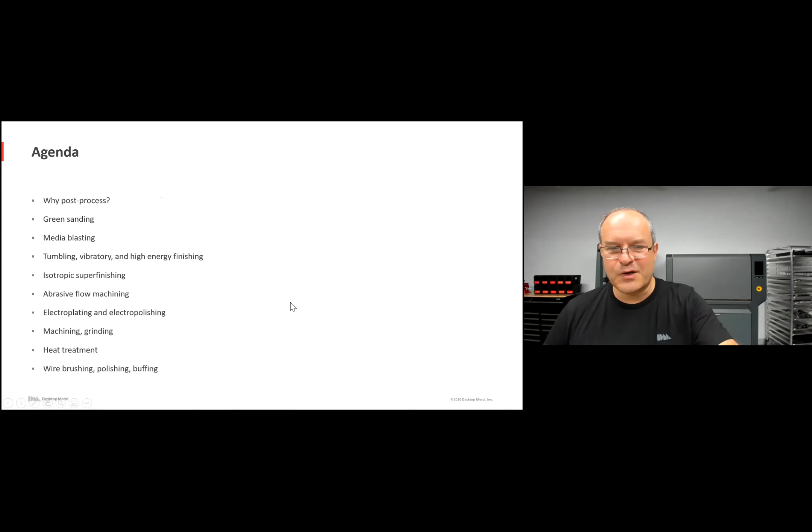First, a little context. Desktop Metal's mission is to make 3D printing accessible both for the early stage of the product development life cycle, so engineers, designers, but also for manufacturers, so you can manufacture actual end-use parts and produce parts, whether they're small parts, large parts, by the thousands or millions if you need.

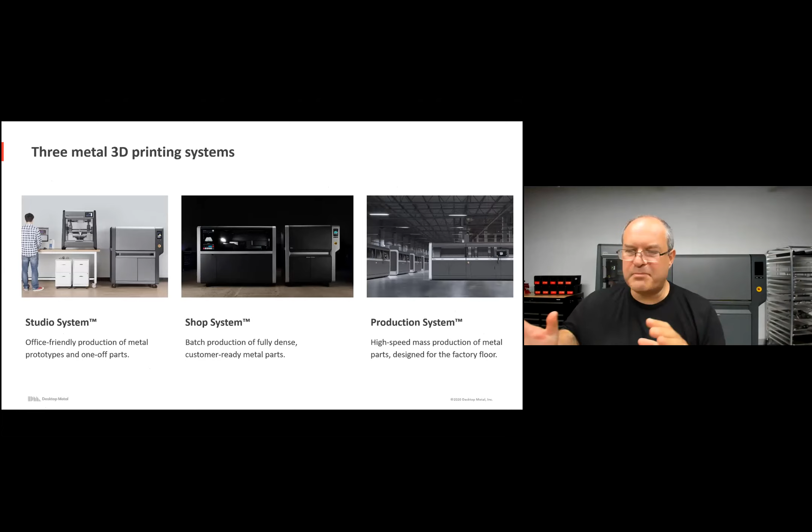And we've brought to market 3 different systems. The Studio system for office-friendly prototyping, that's the system right behind me - you wheel it through the door, plug it in, and start printing and sintering. And then for larger volumes, including batch production, mass production, there's the Shop system and Production system. We'll see parts from all of those systems and how the different finishing methods work for them.

So first, the need for secondary operation. It's worth saying that really not everything requires post-processing. There's plenty of parts that come out of the furnace, the part as printed and sintered, that work just fine. On the other hand, there might be applications where, for one reason or another, you might need to do some post-processing. So we'll talk about that, but it could be, depending again on the application, the dimensions, the design characteristics, that the part works just fine.

Now, what are the characteristics of metal 3D printed parts? Because they are somewhat different than, let's say, parts that are machined or parts that are cast. First of all, what do you get? You get a part that is near net shape, so it's close to what you need, maybe even works just fine.

So here's an impeller printed right on the Studio system. And you know what? This impeller will work just fine if you plug it into the machine that it goes in. And so with 1% or better tolerances, for many applications that's fine. But if they're not, then you may need to do some post-processing.

And so 3D printed parts do show some visible build lines. So here's a sintered part, and you'll kind of see the layers. This is the printing orientation, prints layer by layer, and so you can see visible layer lines. If you need to get rid of them, there are a few different options.

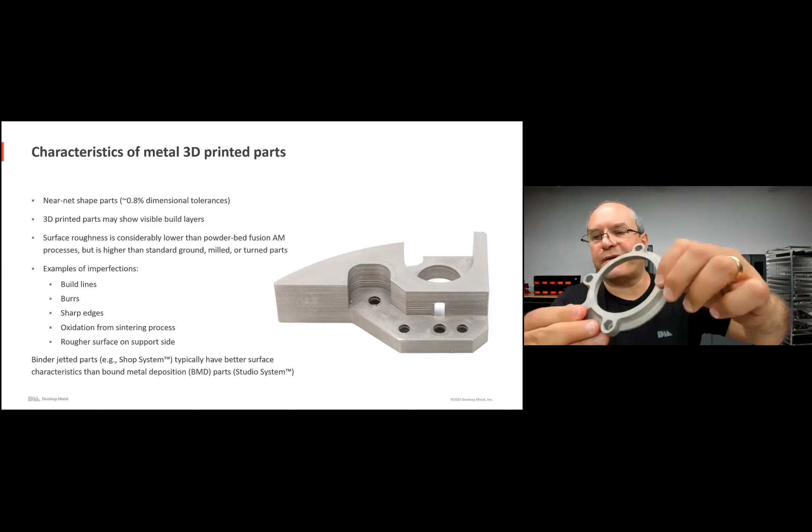Surface roughness is considerably lower than powder bed fusion, another common way to produce metal parts, but it is rougher surface than standard ground, milled, or turned parts. So for example, the surface roughness of this part, it's quite smooth, definitely smooth to the touch, but it'll be probably 3 or 5 micron average roughness, whereas machined parts are going to be smoother, maybe by a factor of 5 or even 10. And there will be, depending on the printing technology, some imperfections.

You might see build lines. There might even be, depending on the geometry, some burrs that you may want to get rid of. There also may be some oxidation just at the very surface, literally a couple microns worth - even though you might print it as stainless steel, in the furnace some of the chromium might have evaporated from the surface. So there might be just less than a micron kind of oxidation, but that's easy to get rid of with, say, media blasting. We'll talk about that as well.

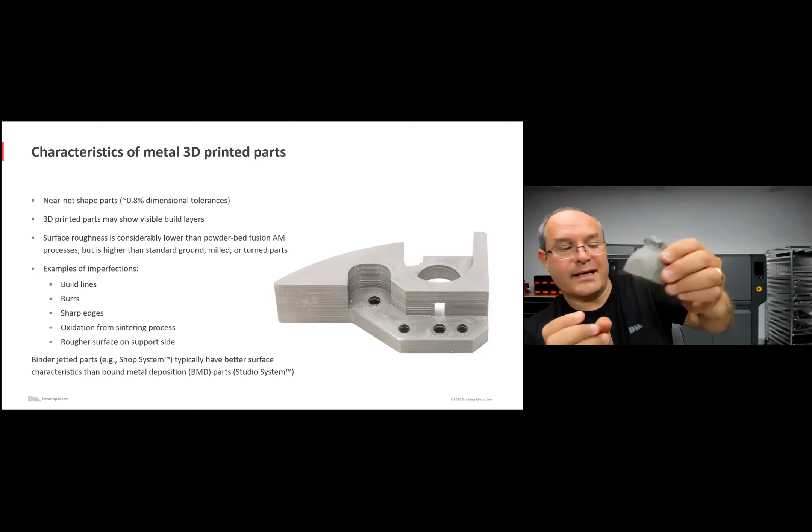Of the two different approaches, the studio system and the binder jetting solutions from the shop production system, the binder jetted parts have even better surface characteristics than the studio system parts. For example, this is a part printed on the shop system. You'd be hard pressed to see the layer lines, and this is quite a smooth part. Contrast that with this part, still smooth, but you can definitely see some build lines, toolpath kind of lines, and some imperfections, especially on the support side. That's what you get with metal 3D printed parts.

It's worth showing this comparison. I mentioned surface roughness. It's not the only reason you may want to do some post-processing, but roughness could be one. As sintered, you might have a roughness of 5 microns, and depending on which finishing method, you can get 5 times, even 10 times, or 50 or 70 times smoother. For example, CNC machined parts might have half a micron roughness versus isotropic super finishing.

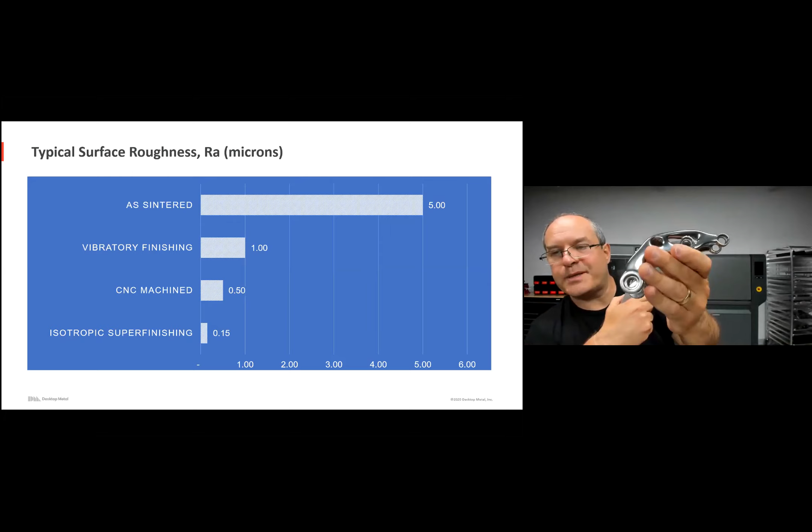So this is one example: a bracket for a motorcycle. Here it is resting on the support as it was printed on the studio system. But the part was also post-processed with isotropic super finishing - we'll spend a little time on that as well. And you see, you get remarkably, it's 150 nanometer kind of finish, which is insane. It's even smoother than machined parts.

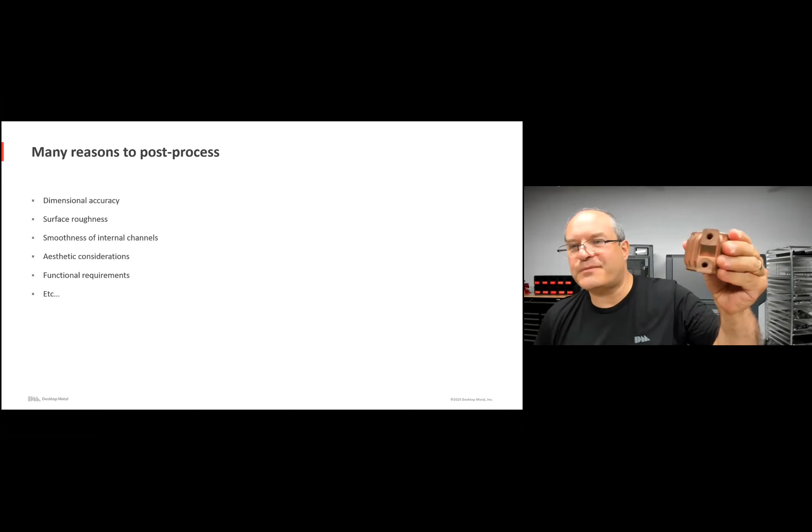So there's a bunch of reasons to post-process. Dimensional accuracy is one, surface roughness is another. You might have internal channels - for example, here's a copper heat exchanger that has internal cooling channels and some fins, as you can see. You may want to hone or smooth out the internal channels so that whatever fluid flows through there flows with less resistance.

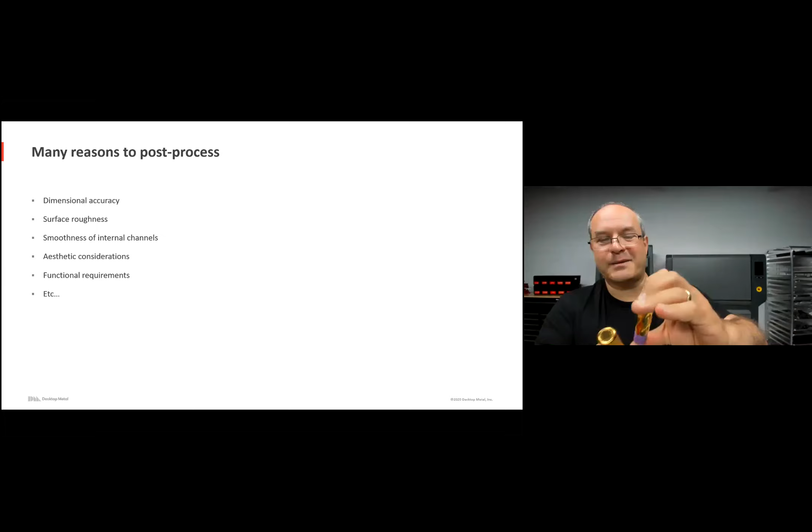And there could also be aesthetic considerations. Maybe you're printing prototypes of lipstick holders, lipstick cases, fully functional. Or you might have shift handles - see some of these examples finished in different ways. This is black nickel, this is gold plated, you do a nice chrome kind of finish. So there could be aesthetic considerations and other functional requirements, maybe you want to passivate a surface, for example.

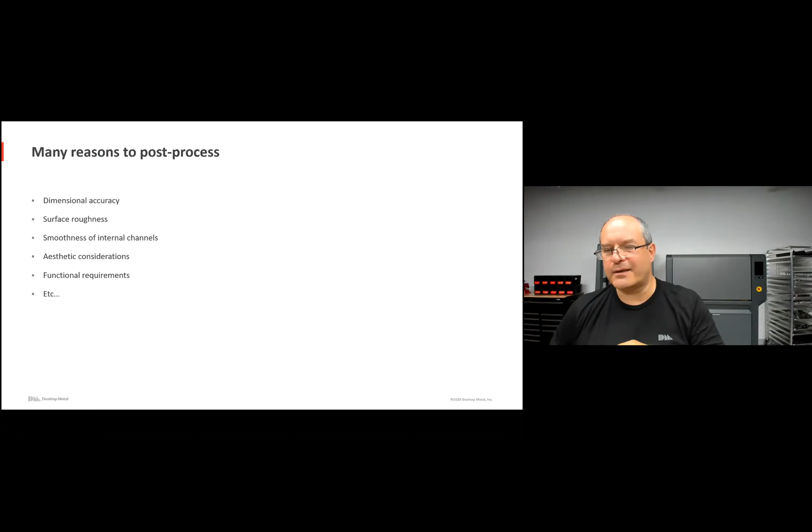So let's begin, let's look at a bunch of these different finishing methods. First is green sanding. What's green sanding? Well, the part when it comes off the printer - that's the printer right over there - when it comes out, there are minor imperfections in the printing process that you're going to see. And it turns out it's a lot easier to get rid of these imperfections while it's still in the green state, prior to sintering.

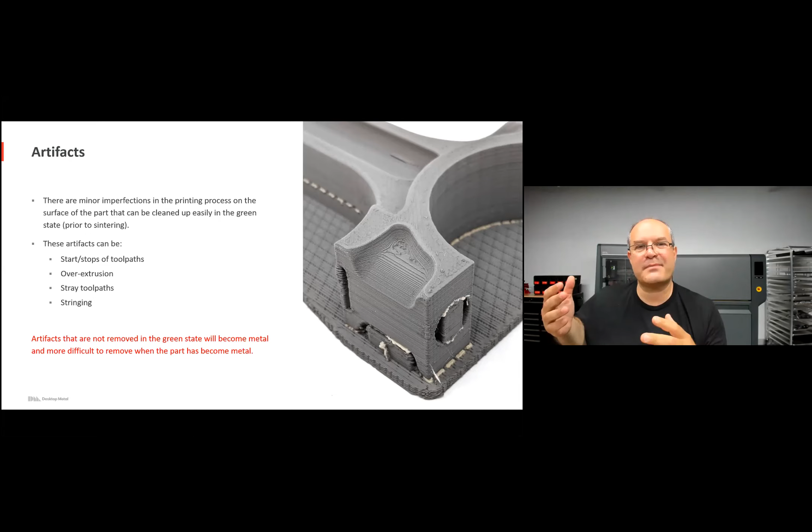In the green state, it's got the consistency of a crayon, and a crayon is much easier to cut away and smooth out. For all these artifacts, if you don't remove them at the green state, it'll be a lot harder, 10 times harder, 10 times longer to get rid of them once the parts are metal. So to the extent possible, if there's any obvious imperfections, green sanding is something that we recommend. This is a process that smooths out the build lines, the toolpath artifacts. It's performed after the printing process, and you can save a lot of time. You can almost eliminate the appearance of the layer lines, and get a surface finish that's much smoother.

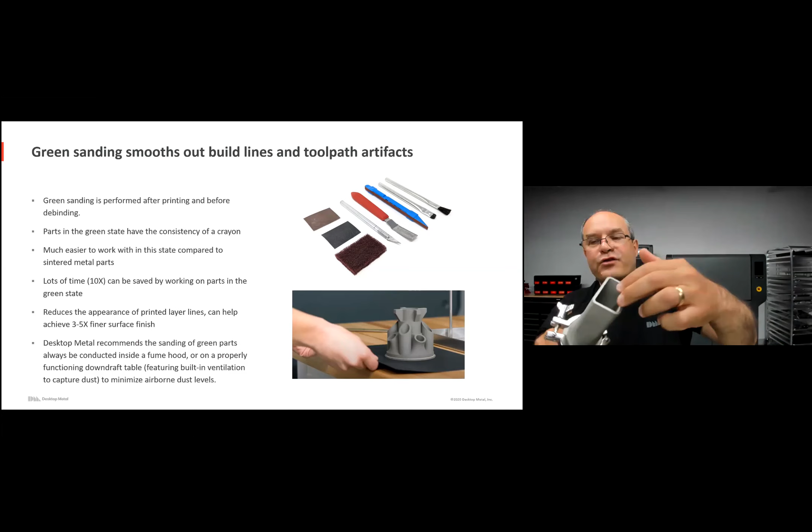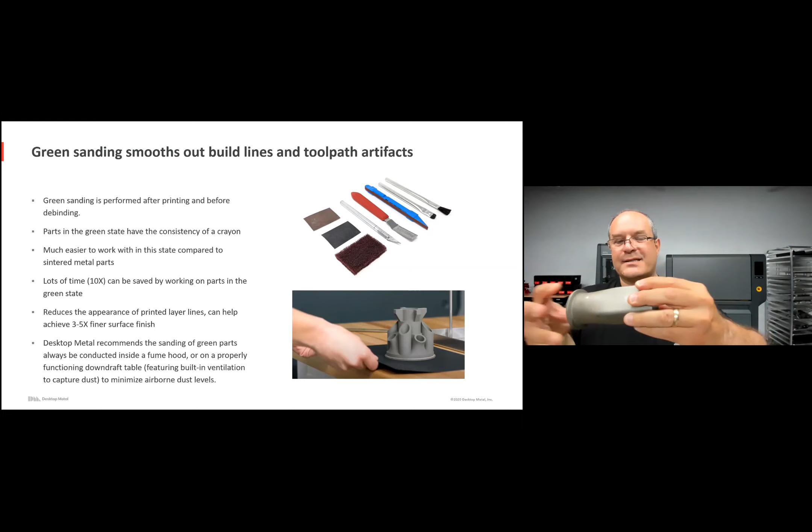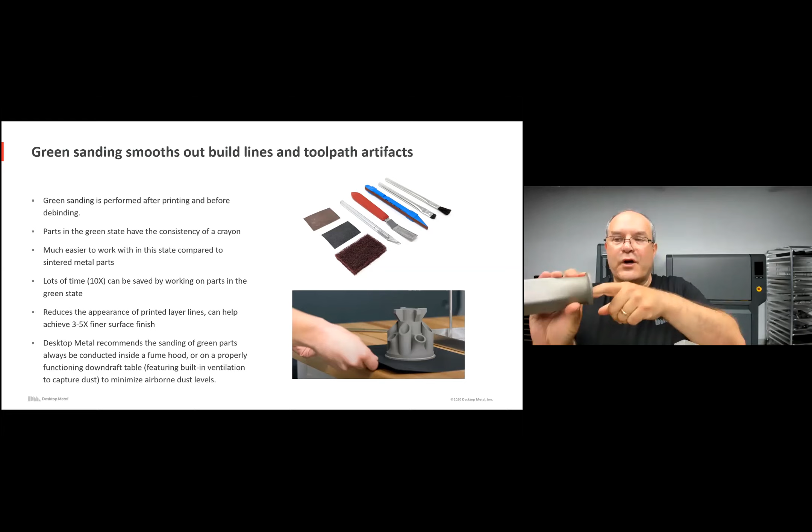I'll show you an example. So here's a nozzle, this is a standard part of machinery. This is the part that was printed. What's important for this nozzle, and I think we'll see this example in a few slides, is through this channel flows - I'll show it not connected - there's an interface. Through this channel flows a ceramic slurry that's thick and abrasive, and it flows better. This is an extruder, and out of this rectangular part is what the slurry is meant to be formed into. It's like a pasta maker, except you're creating a shape with thick ceramic mass. It flows easier if the inside is smoother.

Being able to polish or sand it in the green state, you can achieve a much smoother surface in here than with the standard part, where you can actually see the build lines.

So that's an example. We recommend sanding of these green parts to be inside a fume hood or a downdraft table that basically ventilates and captures the dust to minimize the airborne dust from the sanding process.

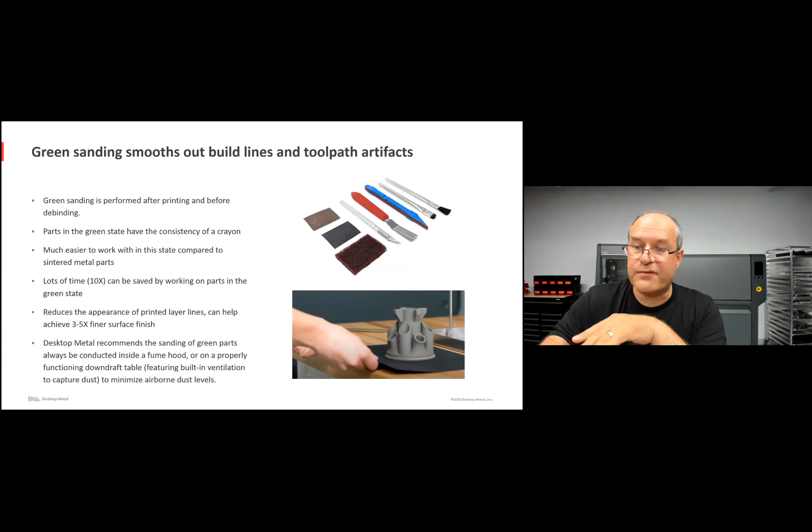What can you use? Well, Scotch-Brite, you know, you might use this on your barbecue grill, but you can also use it on the green printed parts. So the abrasive hand pads, for simple imperfections, you can just polish them.

And then you can use sandpaper in a variety of grits, progressively going initially with a medium grit, then fine, very fine, to really smooth out. It really depends on how much you want to get rid of. The trade-off here is sandpaper can get rid of material pretty aggressively, so you want to be kind of light with how much you use it.

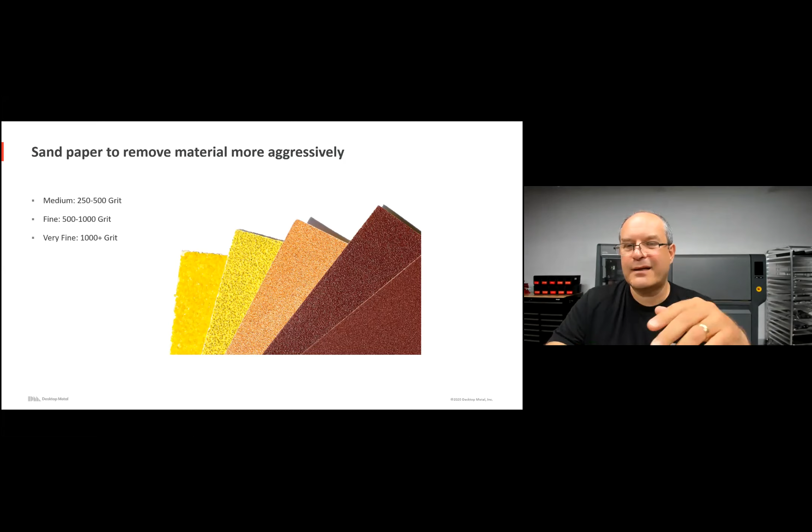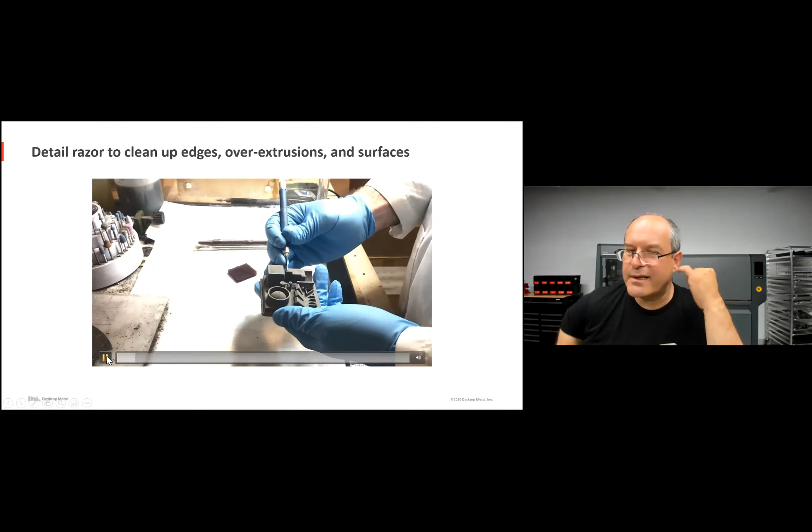So here's an example of a green part getting sanded. You can use a detail razor to clean up some of the edges. It really depends on what the imperfections are and what you need functionally from the part, but that does some amount of cleanup.

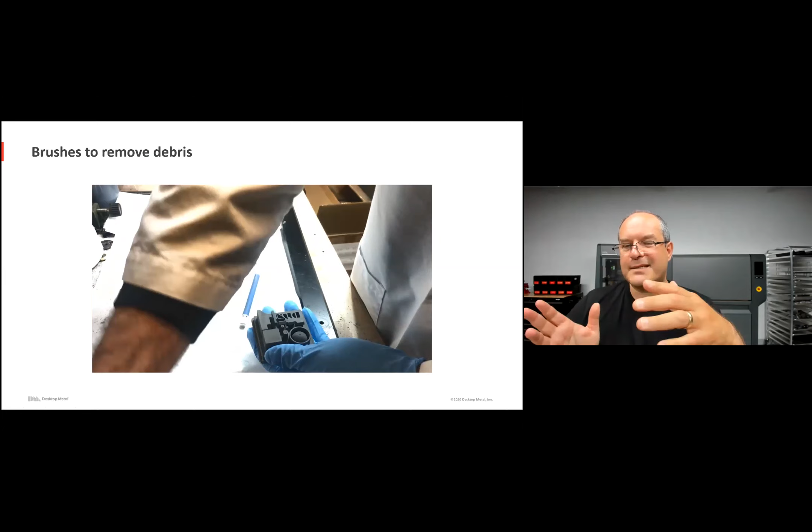You can even use a brush to get rid of debris, depending on how much debris there is. This is mostly necessary not for the mass production shop system, the production system. It's more for the studio system, a kind of extrusion-based shape creation, where this might be a useful technique.

So that's brushes. And here's the example, this is that very nozzle. Here's the interface.

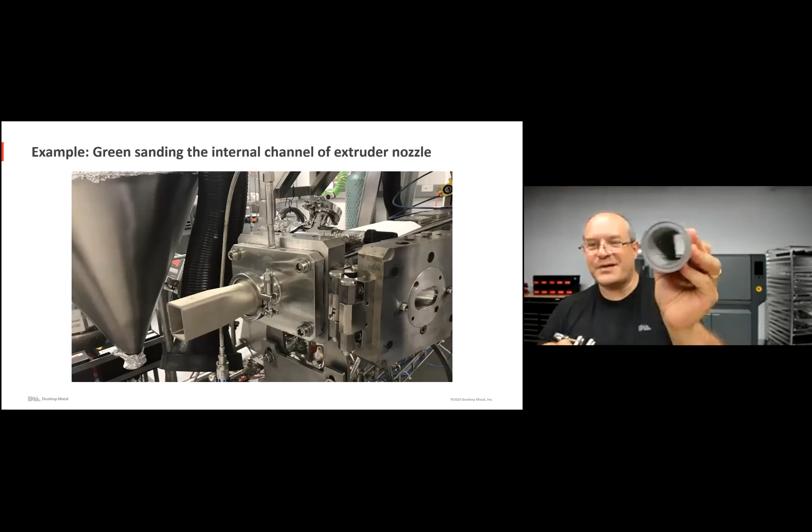So with a gasket, it comes on through here. The twin screw extruder pushes the ceramic slurry, and the less friction inside the channel, the better. So the green sanding was great as a way to get a remarkably smooth internal surface.

Okay, next is media blasting. This is a great way to remove surface imperfections. Your part is inside a cabinet, or you can put a bunch of parts inside the cabinet. Then, under pressure, you propel the blast media, which could be glass beads, loose ceramic alumina, or steel shot. They all have kind of different results.

For example, the spherical glass beads impinge on the surface and produce a very small dimple, and this dimple behaves like a concave mirror, so now you have a much more uniform, satin sheen to the parts.

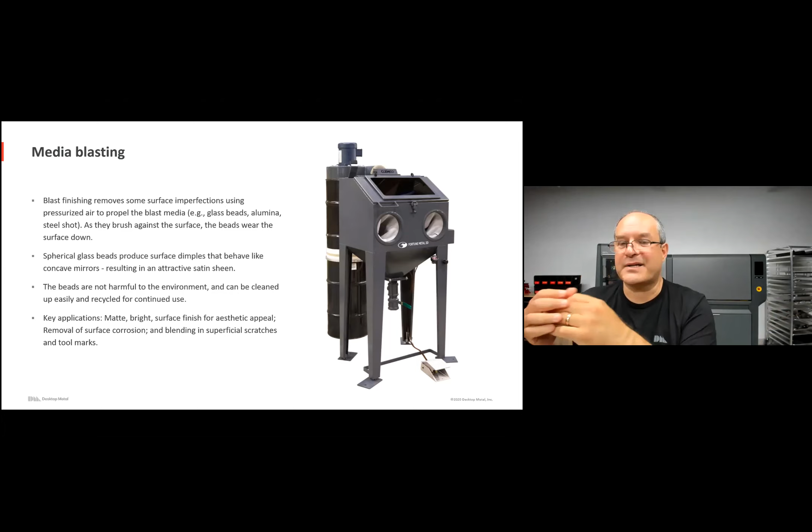Some examples, here's a part that was sandblasted. This is quick enough and easy enough that we recommend doing this with most metal parts. Now, if you're printing a part that's going to go into the bowels of some equipment, never seen again, and doesn't come in contact with people for the most part, no problem, but it could be useful to just do a quick media blast.

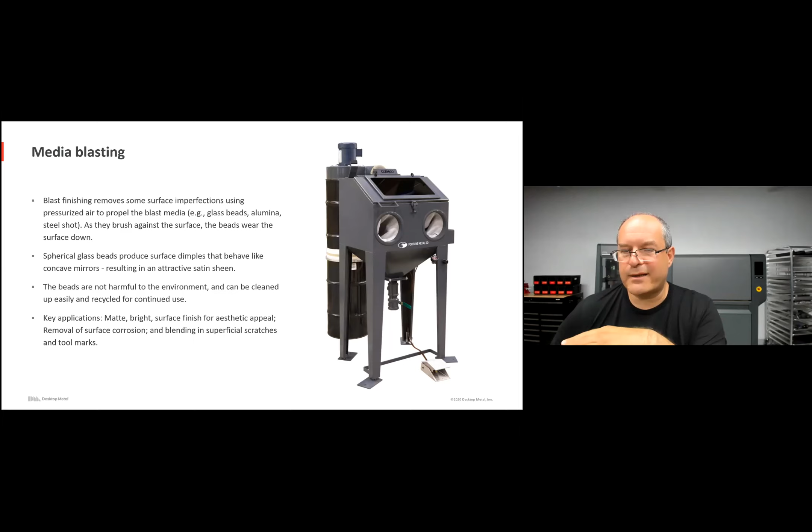The applications are to go from matte to bright on the surface finish for aesthetic appeal. You can remove corrosion - that's a great way. If there's a few hundred nanometers, or even tens of nanometers, of oxidation on the parts, sandblasting or using steel shot, for example, could be a great way to get rid of it and blend superficial scratches or tool marks.

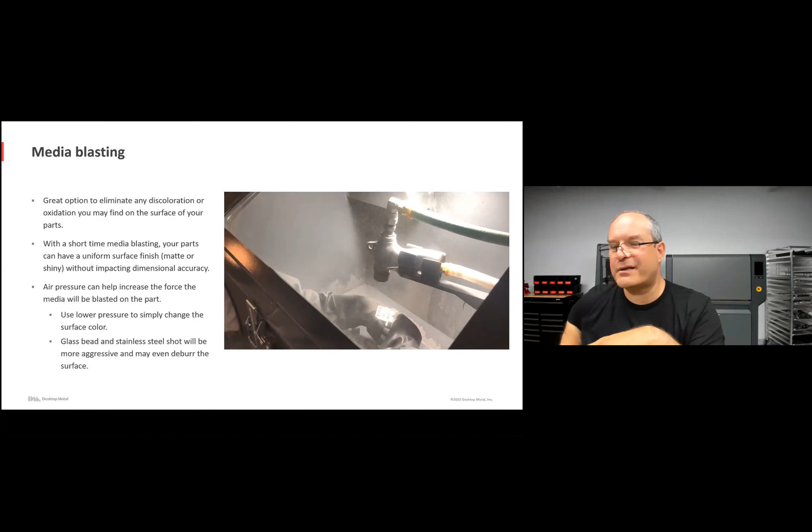You see this is a part, and the pressure is operated with a foot pedal, so you just put the part underneath, and under pressure inside this cabinet, direct the flow onto the part.

Even with a little media blasting, the parts will get a uniform finish, getting rid of any oxidation or surface imperfection, and it really doesn't impact dimensional accuracy on the part - you're not removing tens of microns of surface, for example.

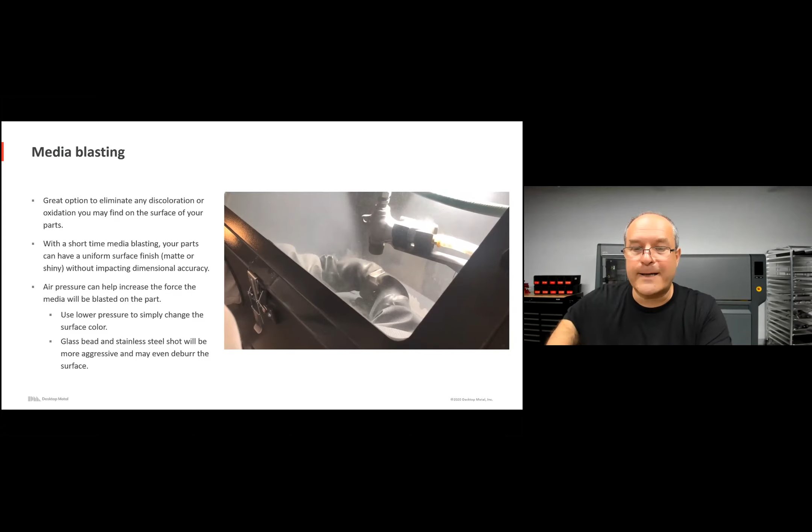And you can use lower pressure if you just want to change the surface appearance, and you can use glass beads or stainless steel shot if you want to remove more material.

Few examples, most parts leaving Desktop Metal get some sort of a blast, even if it's a crankshaft or a gear. This is going to be a sun gear inside a giant earth drilling equipment transmission gearbox, or this timing belt pulley, one of our customers printed for their manufacturing floor.

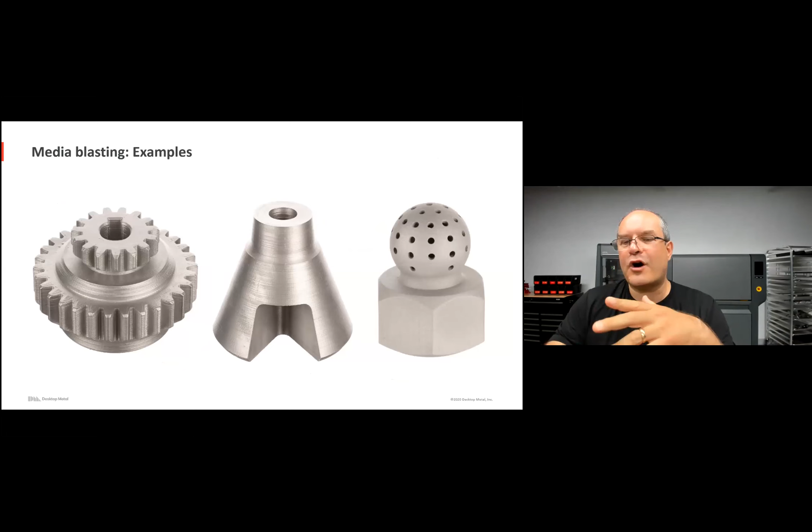So the parts, whatever the part is, spend a few seconds in media blast, you'll get a more uniform finish. I recommend the cabinets are low cost enough that it's kind of almost a no-brainer. If you're going to be doing a fair bit of metal 3D printing, that's a great thing to do. Put the parts through.

Fortune Metal Finishing has a great blast cabinet solution designed specifically for Desktop Metal. We work with that team a lot. It's a great cabinet, we have one here. At fortunemetal.com, you can see they have information on the blast cabinet itself, as well as an application note on what the benefits are of air blasting and trade-offs of different media finishes and what they get you.

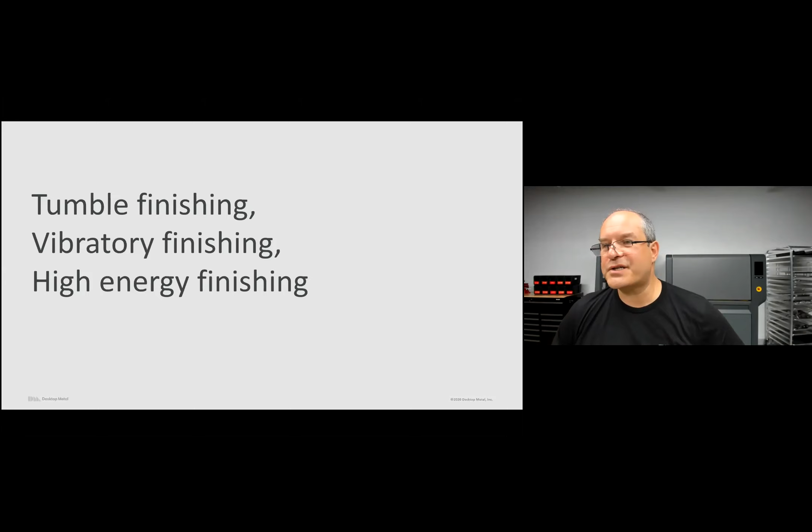Next, kind of a logical progression from media blasting is let's talk a little bit about tumble finishing, vibratory finishing, and high energy finishing. So what are these methods?

This is a group of processes where, with relatively low energy random motion, it could be spinning at moderate speeds, or in a container that's a vibratory bowl that's getting shaken. Basically put the parts in along with some abrasive media. It could be the abrasives, could be some fluid to make everything circulate evenly. And you agitate this container with some sort of mechanical method.

This is great for mass finishing. So you've got a whole lot of parts you want to finish, you throw them in for hours, or it could be a day or two even. And it works - by mechanically putting the abrasive media against the work pieces, they'll become smoothed out, you'll blend edges, blend away imperfections.

It's great for geometrically simple components. Why is that? Because if you have internal channels that might be harder to get into, you'll have non-uniform material removal. For example, if you take this part, depending on how large the abrasive media is, it'll have pretty easy access to the outside of the piece, but maybe inside it won't get into as easily.

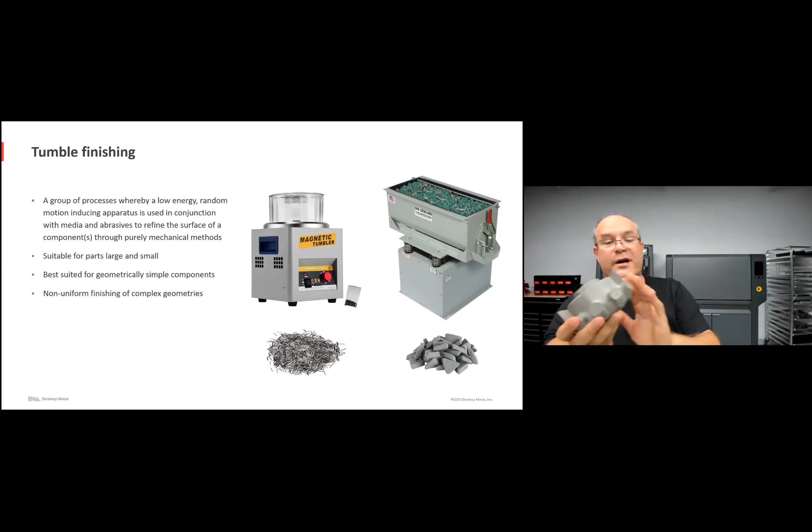So it'll wear away the outside more than the inside. But really, it depends what you're trying to accomplish. If you're mostly trying to get rid of sharp edges on the outside, this is a great way to do it. And in general, you can still get great finishing from just tumbling parts - you can get both a smooth and visually appealing finish.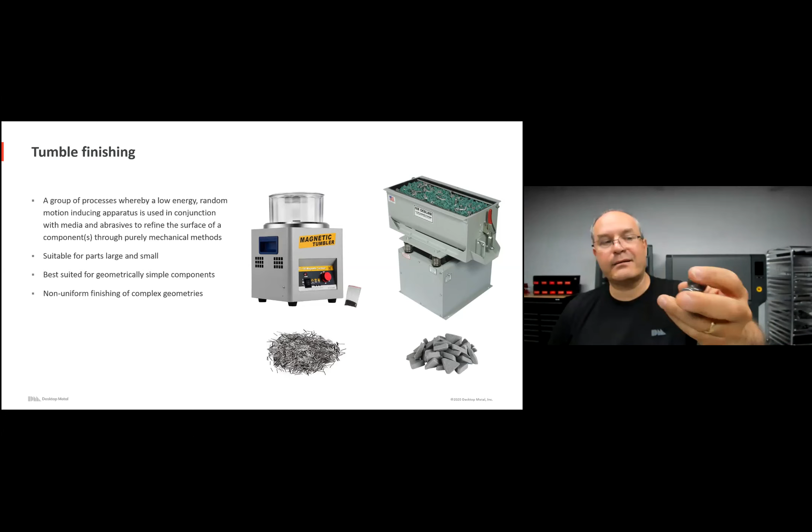You can do pin finishing. So if you have small parts, whether it's jewelry or other relatively small parts, you can use this - a small container with pins inside, hence the name pin finishing. There's a magnet, it spins, and as it spins, the magnetic media follows it, giving you this kind of circular motion. The rotation of the magnet spins the media, and the media then deburrs the work pieces inside.

This process can also be extended to much larger parts and larger volumes, so you can do batch type finishing. It's hard to tell from this picture how big this part is, but actually a 5-6 foot human can stand on just this platform. This is a pretty large piece of equipment, could be 8 to 10 feet across. It's great for batch type finish processing where you have a lot of parts and abrasive media, and it's open so you can monitor it.

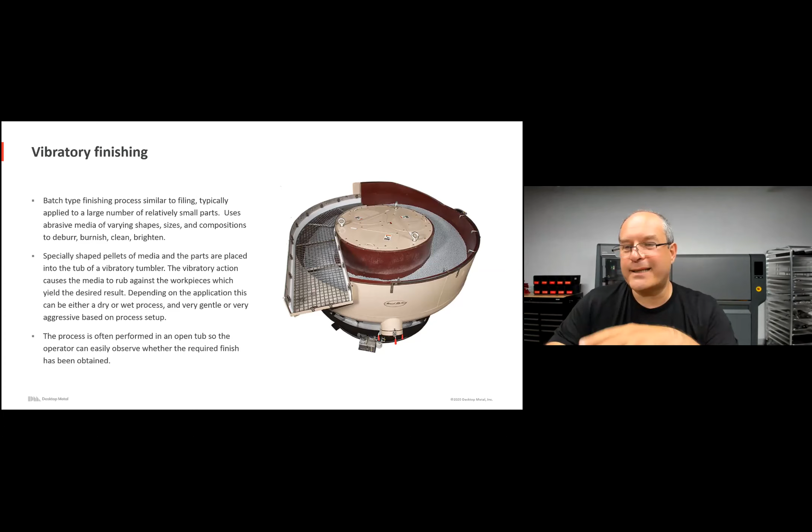You can literally see what's happening with the parts, inspect them, and that makes it that much easier - you throw it in at the beginning of the day, check at noon how the parts are, are they shiny enough, are they smooth enough, and then take them out when it makes sense.

Next, an extension of that, kind of on steroids, is the high energy method. Conceptually, it's similar to the vibratory method in that you have the part getting polished, the abrasive media, and you may have some fluid inside, but this is put inside a closed system that is then spun very fast - hence the name, centrifugal disc.

Centrifugal disc: the parts are getting spun much faster, so the abrasive brushes past the parts at a much faster rate than with the vibratory bowls. As a result, your material removal rate can be 5, even 10 times faster. So it's dramatic. It really uses a lot of centrifugal force and mechanical advantage to take away material.

It's much faster, but the trade-off is you may have less precision with how the material is removed, and you have the same unevenness where, depending on if you have internal crevices, the abrasive media wouldn't get in there with the same speed. But if you want to remove a lot of material and do a lot of polishing quickly, this is a great way to do it.

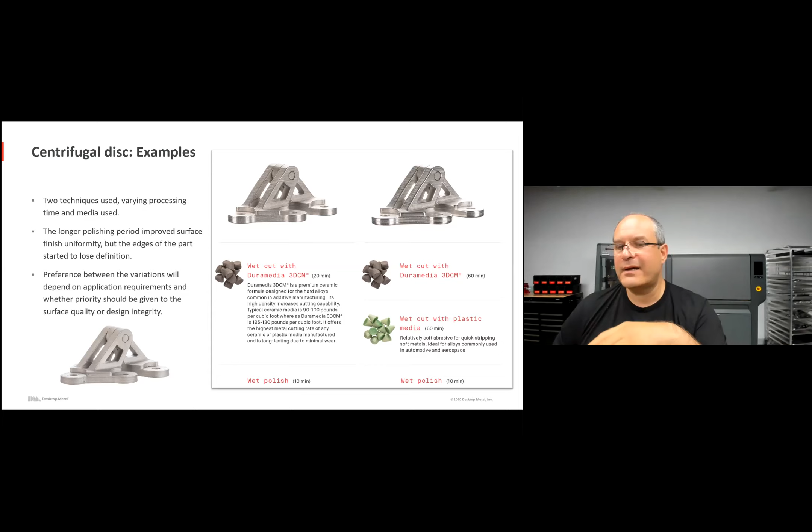You see there's a trade-off: the part is considerably smoother even than the previous one, but you're starting to see some edge rounding. If what's important is the sheen and smoothness, the one on the right may be right. If you want design integrity and to maintain the exact dimensions and angles of what you printed, a shorter process may be better.

These are just a couple of examples. There's a number of different recommendations and recipes depending on what you're trying to achieve. All right, let's extend these two - so now we've talked about vibratory bowls and high energy disc.

A natural extension is isotropic superfinishing. This process combines those mechanical finishing techniques we just talked about with an active chemistry compound. This chemistry compound is designed to react with the surface of the part, just the surface. Here's a great example of it.

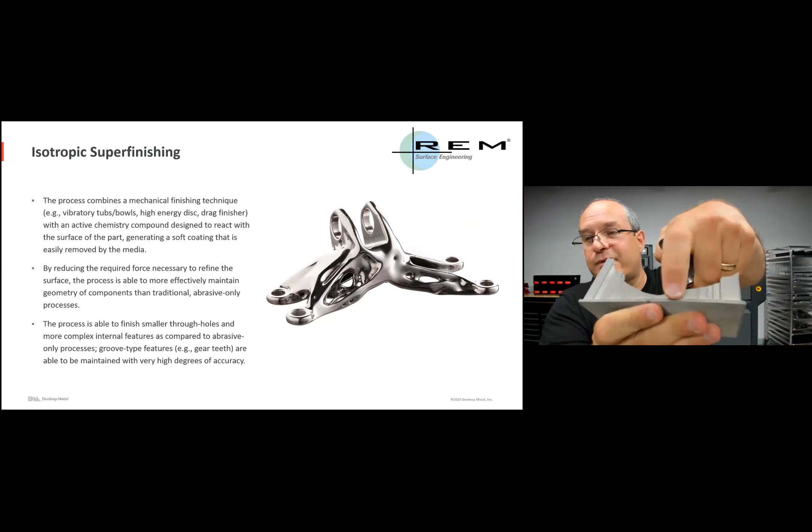The part started out with this exact kind of matte surface where you can see the layer lines. It's immersed in a fluid, and that fluid reacts with the part that started with this finish. By reacting with it, just that top surface becomes soft - like a conversion coating - becomes soft and much easier to remove using the vibratory bowl or the high energy disc method.

This is a way to reduce the required forces necessary to get that smoothness, while still not removing a lot of material. You maintain the geometry you printed in, but still wind up with a very smooth surface. With the previous processes, if you wanted that very smooth surface, you'd wind up actually removing possibly half a millimeter or a millimeter or even more off the surface, so your part starts to change geometrically. Here, you're removing much less, yet still achieving this kind of finish.

So let's take a look at exactly how the process works. It's a two-step process that continuously takes place. I should mention this was really developed, pioneered, and commercialized by our friends and partners at REM Surface Engineering.

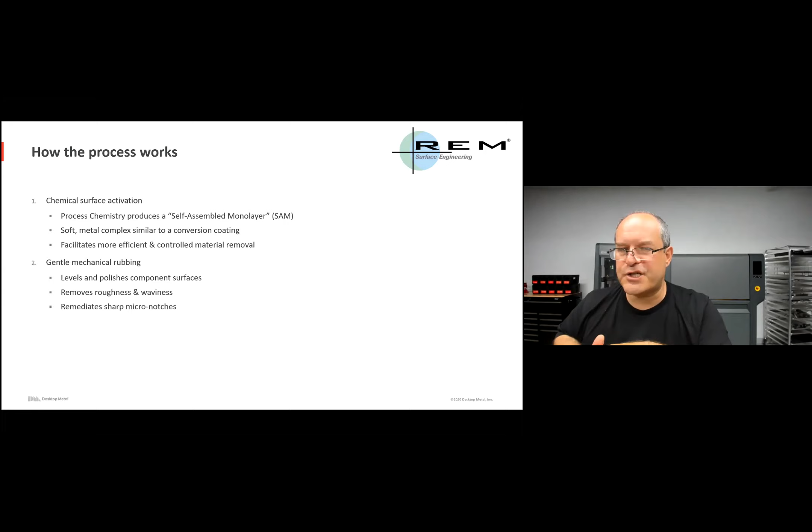So here you have a chemical surface activation where you start out with a surface that can be rough. There's a process chemistry that reacts with a thin layer of this surface, creates a conversion coating that's now soft, relatively brittle, easy to remove with a lot less force than we normally would.

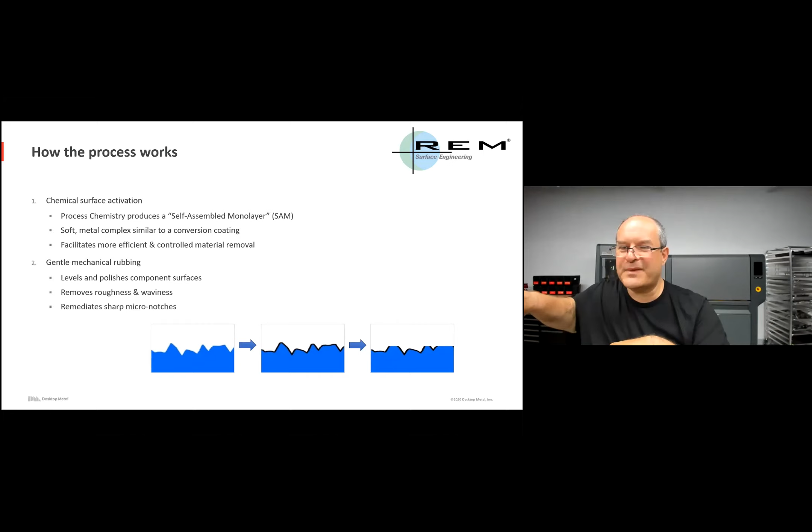And then there's the continuous mechanical rubbing. That mechanical rubbing removes the stuff off the very top of the surface, the peaks. So the mechanical rubbing removes the peaks, not the valleys, the peaks.

But then remember, you've got these peaks, they're still in that liquid, and so that surface activation forms, reacts with those peaks, forms yet another coating, and the peaks are gradually worn away until you wind up with

very smooth surfaces. The end result is parts that have that mirror-like amazing finish with 100 nanometers or even better surface finish, but with a much faster time and reduced geometric alterations.

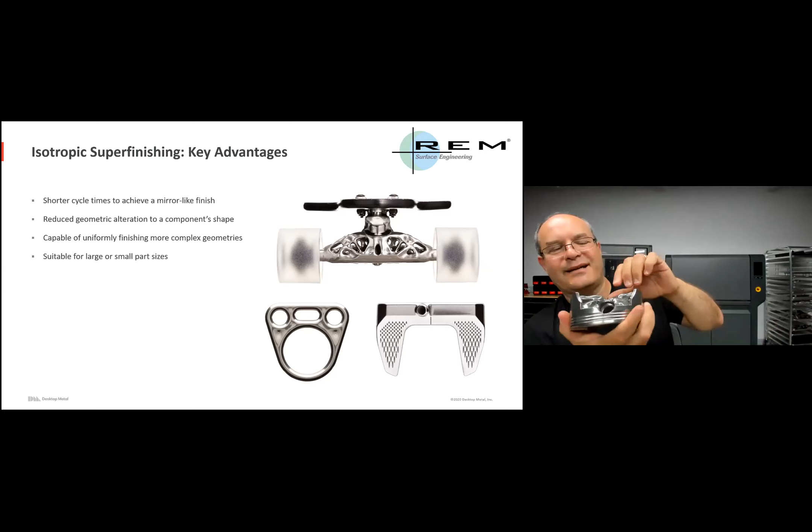This is great for non-uniform kind of parts too. This is an example of a cylinder or piston head. The material can get into all the nooks and crannies, so if you have internal parts you want to get in, this is a great way to do that, and it's suitable for both large and small parts.

The applications, there's a few. One is when you want to alter the surface texture. But also there's mechanical and other functional benefits, for example biocompatibility or surface cleanliness.

If you have a roughness of 3 or 5 microns, maybe that's an opportunity for some problems to form depending on if you're in a chemical or food preparation kind of environment. So you can get cleaner surfaces that way.

It turns out bending fatigue improves too, because you've smoothed out, there's now no sharp notches, everything is a smooth radius. The crack propagation that happens in sharp corners is reduced, and so the fracture bending fatigue is a lot better. This is important in a number of applications, including gears.

So gears, or actually assemblies, move smoother relative to each other. This is an example of a part, in this case chainmail, to make the point of how fine a set of assemblies you can print as just one print. This is chainmail with all the links printed.

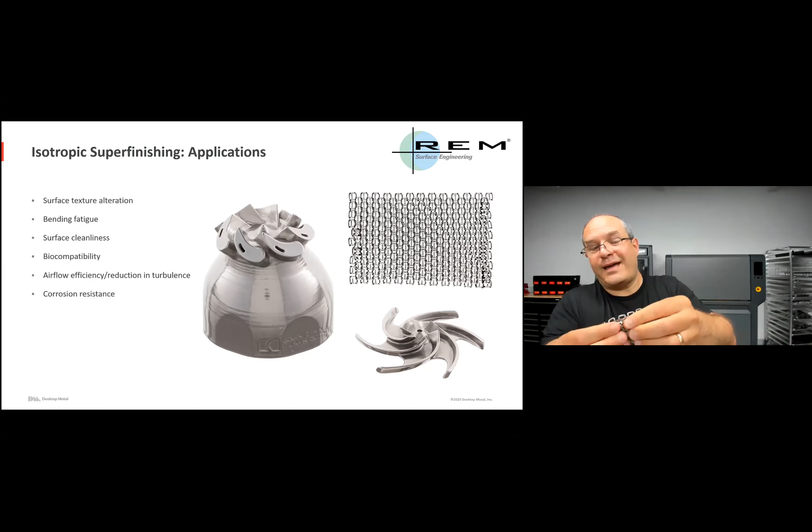If you smooth using the REM process, there's a lot more movement, they move a lot easier. There's no little notches for them to get caught on. So for a whole bunch of reasons, whether it's airflow, corrosion resistance, or surface texture, isotropic superfinishing is a great method.

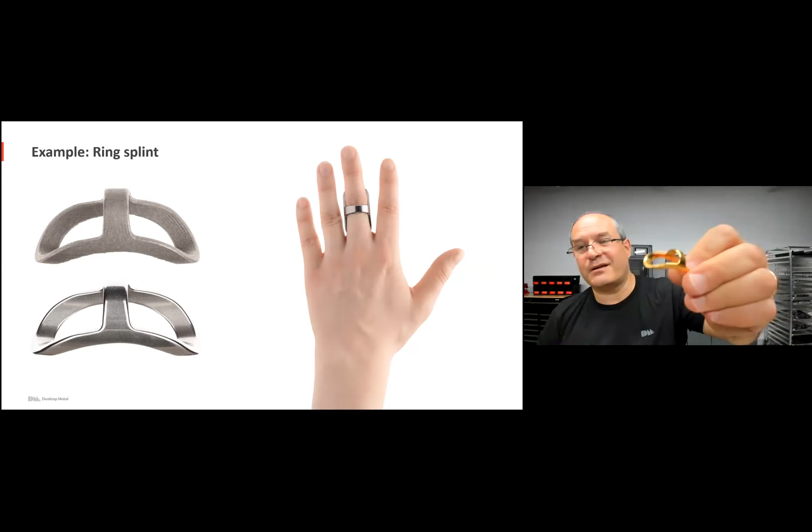Ring splints, here's a great example. This is a ring splint. It comes out fairly smooth, but there's still some notch, some roughness that may not be as pleasing on your limb. With isotropic superfinishing, you can mass finish these and turn them into incredibly smooth surfaces.

Kind of an extreme example of what the REM team has done for NASA: a copper alloy combustion chamber for a liquid rocket engine. It started out with a surface roughness both inside and outside of 15 to 20 microns, which is just kind of typical.

With the REM surface process, they could get it down to almost 100 times smoother on the outside, less than a quarter micron on the exterior, and better than 10 times smoother on the inside, less than a micron and a half surface roughness.

So pretty remarkable results. When you're choosing, there's a lot of variables here, a lot of options, a lot of knobs to turn, and so REM is a great resource. There's a number of considerations, both what you need from the desired part in terms of surface condition, the costs, and the geometric complexity of the part.

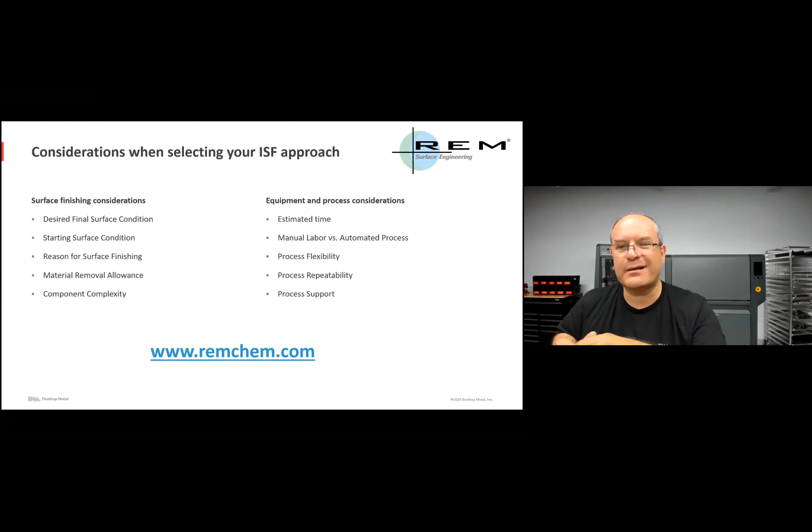Is it complex, not complex? There's a bunch of equipment considerations, and trade-offs between how flexible the process is to different kinds of parts and chemistries. Some parts are easier to run, but there may be trade-offs with process time and process cost.

So REM is great for guiding you through that. There's two ways to work: one is you just send them the parts, and they send you back the shiny, amazing-looking parts, or they can have installed solutions. That's actually what we have at Desktop Metal—we have one of these REM systems.

They've worked with us to fine-tune the process, the media, and get the whole formulation right. So there's both ways to work. If you have just a few parts, send it to them. If you have a lot of parts you're finishing - think Craftsman wrenches and sockets, mass finished this way - then it makes sense to bring it in-house.

Next, let's talk about extrusion honing, also known as abrasive flow machining. This is needed when you have internal channels, particularly ones that curve, and you want to smooth them out. That channel might be long and curved, so there's not an easy way to get in there and really smooth it out, and you might want an incredibly smooth finish.

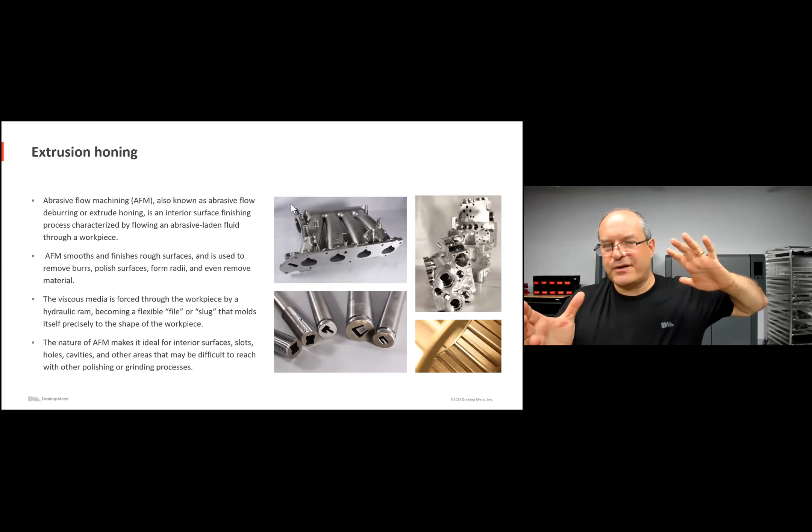Normally when you print something, the surface roughness is 5 or 10 micron average, but maybe inside the channel functionally you want it to be 10 or 20 times smoother than that. A way to achieve that is with this unique process, which takes a viscous media and adds abrasive to it. This viscous media pushes through under pressure, combined with the abrasive - it's almost like taking just the abrasive parts of sandpaper, loading a slug of viscous media that pushes through. This is actually quite broadly applicable.

I'll show a few examples. If you have a vehicle with manifolds, by smoothing out the internal channels you can actually get 20 to 30 more horsepower, which matters if you're building a racing engine or a dragster.

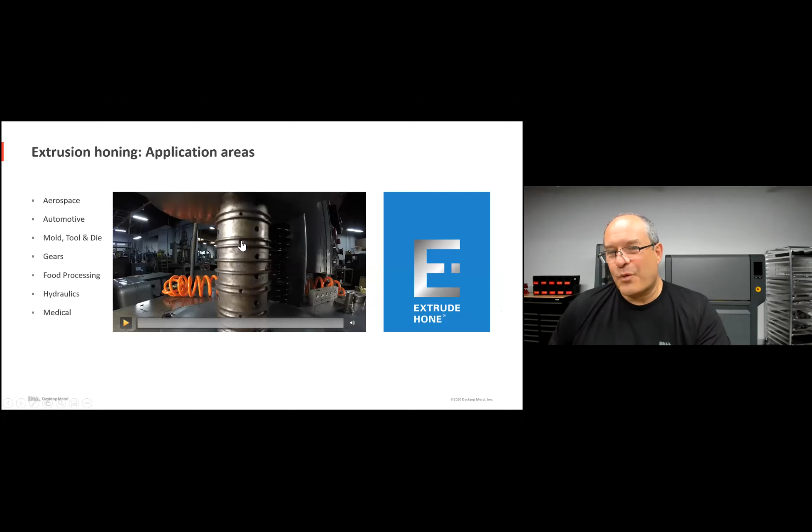First I'll show the process - this is kind of cool. Watch this: this is a part with internal channels, and now the machine gets turned on, and this clay media under pressure is getting forced through, loaded with an abrasive material. As it gets pushed through, that slug is entirely recyclable, so you can run it again under pressure. I'm going to run it again because I think it's so awesome and mesmerizing.

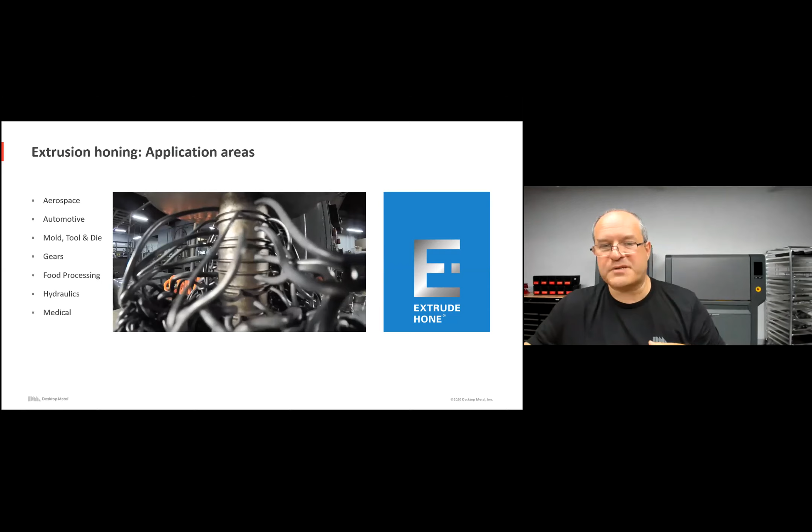Whether it's an aerospace application, automotive, tooling, or just parts - like the internal cooling channels of a heat exchanger, or extrusion dies that you printed - it's a really great way to make internal channels smooth.

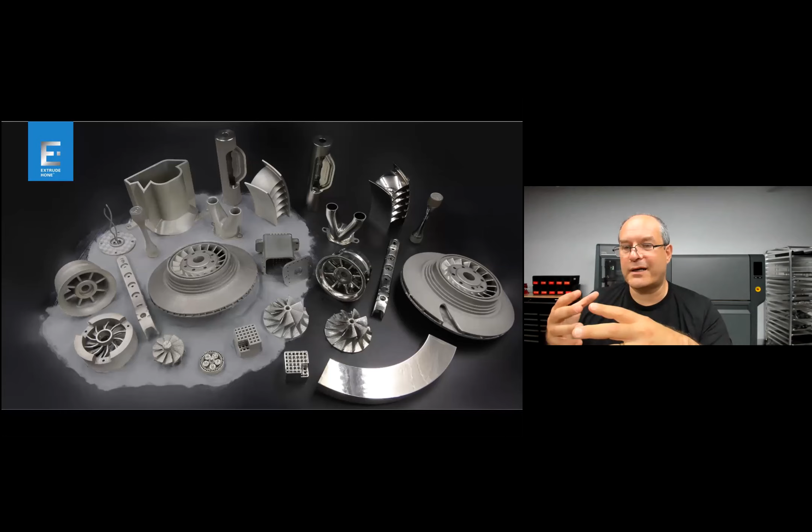The company that pioneered this process is called Extrude Hone, in Irwin, Pennsylvania. They have offices all around the world, but this is the headquarters. Whether you have 1 or 2 parts, they can do a little contract for you. They also sell capital equipment, and then they'll help you service it and provide the media for that. So this is a great way if you have internal channels you really want the guts of them smoothed out.

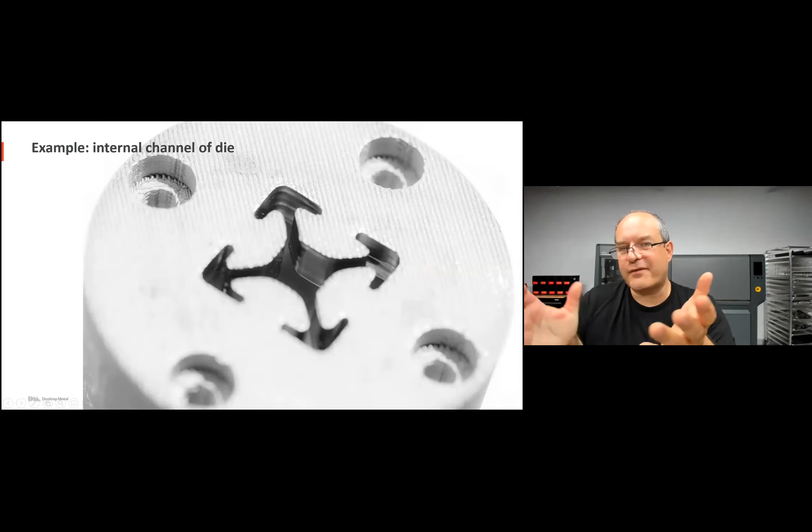In our case, here's an extrusion die for a familiar 80-20 kind of shape, printed on the Studio System. You can use it to extrude plastic or aluminum. For that molten or very hot material to flow well through the extrusion, you want a very smooth channel. So this was extrusion honed on the internal channel of the die - you can see it's like a mirror finish inside. Now you have a better functionally performing tool and die, or tooling.

Next example, we're just breezing through these. Let's see how we're doing - yep, doing good on time.

There's a lot of reasons why you may want to electroplate parts. You can electroplate these parts - there's nothing specific to metal 3D printing. These parts can be machined, or they can be the parts you printed. Just like you may plate today parts that you machine or cast, the same way you can electroplate parts that were 3D printed.

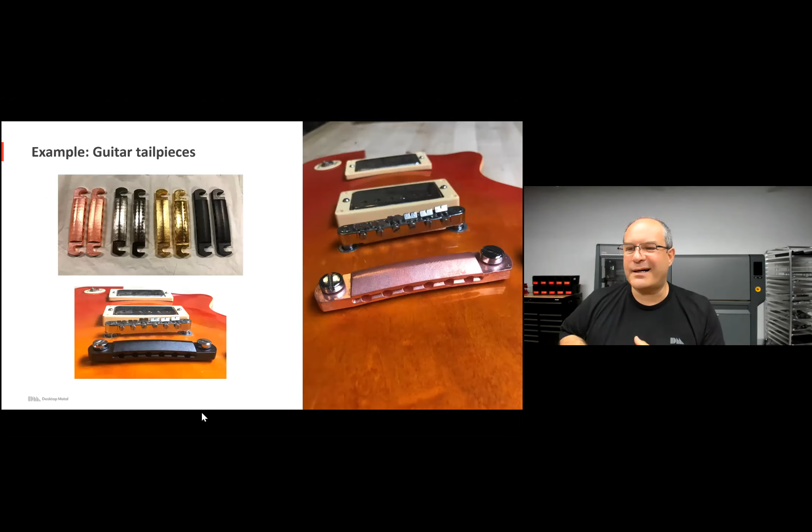A lot of our parts have been plated. I'll show just a couple examples. These are guitar tailpieces - they all started out as printed steel parts, but maybe for aesthetic reasons you want to plate them in copper, gold, black nickel, or other methods. Gold plating, some great examples - you've got these lipstick holders you see here. This finger splint you already saw.

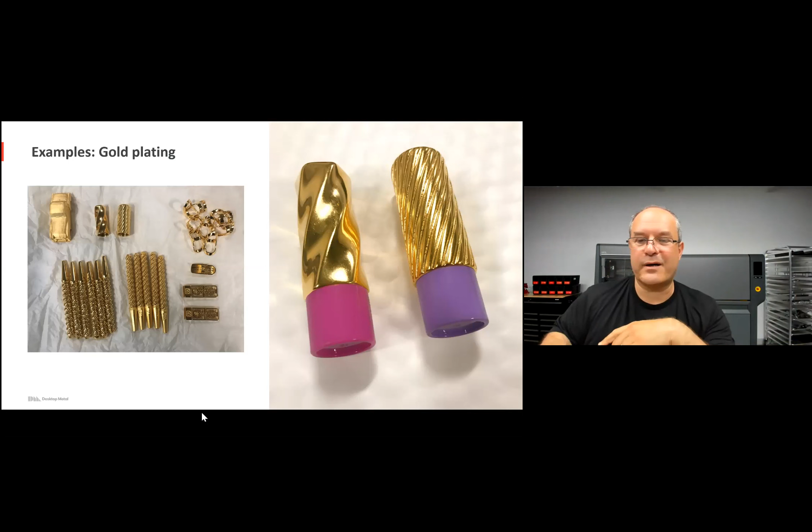So this is now a very straightforward thing with metal 3D printing. So that's metal 3D printing. The other process, run in reverse, actually removes material.

Electropolishing is a great way - you've got a similar bath, but running the current in the other direction, you actually remove material from the surface of your workpiece. Why do you want to remove material? To reduce the surface roughness typically, to level out the peaks and the valleys. This is another great way to polish irregularly shaped objects. So if you have internal features, let's say I wanted the inside of this bulb nozzle - the inside of it is hard to get for abrasive media. By electropolishing, if you really cared about the inside being smooth, electropolishing is a great way to do that.

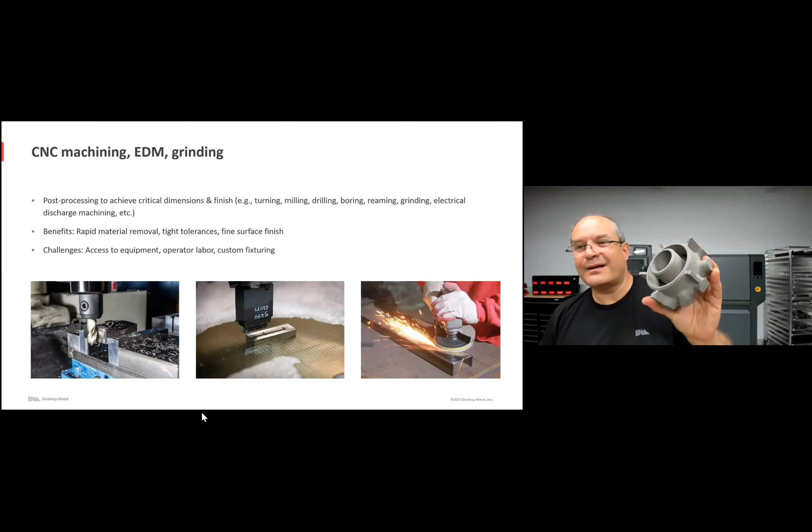And so that's electropolishing. Let's talk a little bit about machining, grinding. This is a burner tip for a combustion engine - the part normally would be cast. It was 3D printed on the Studio system as a replacement part for a part that failed, that was cast in 1967. So a part from 1967 is 53 years old today. The part broke, the original casting tooling is not around, the company that cast it is not around, but as a replacement part you can now 3D print it on the Studio system. What's my point?

The point is, this part does not need any post-processing - it works as is, dimension-wise. But you could have a scenario where, let's say you have a gear where the keyway, or the bearing, or the part that this gets mounted on, needs a very precise tolerance. Or you might have tooling, like a mold insert, that in order to fit really needs to meet very tight tolerances. Of course, you can CNC, EDM, or grind - these are examples of 3D printed parts getting EDM'd or ground.

Great example is, where is it? So here's a lathe gear.

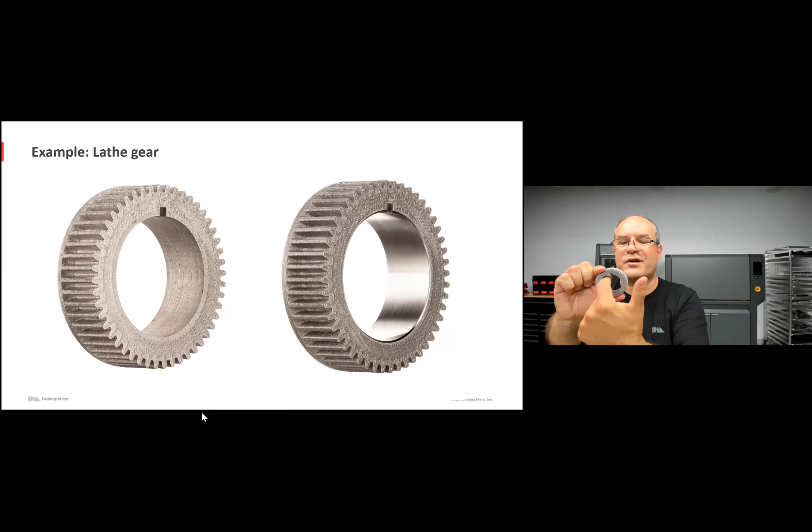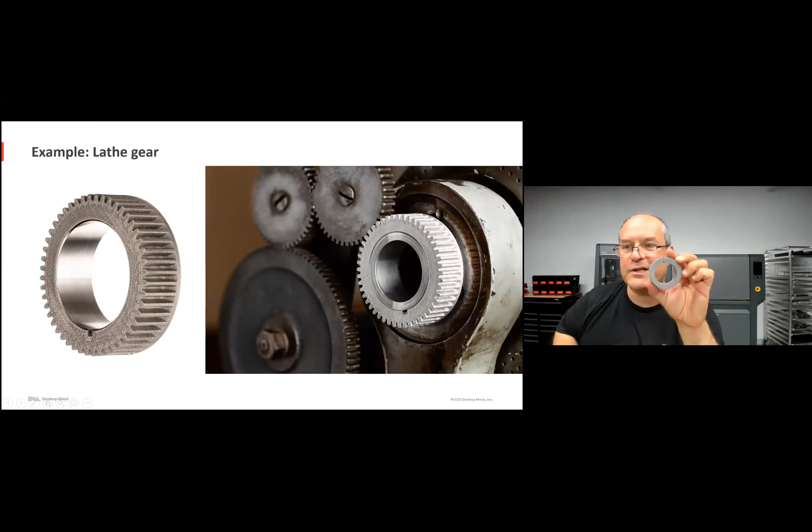It turns out the internal surface needed to be both smooth and dimensionally extremely accurate to fit on a particular shaft. Here's the gear printed to near net shape. The teeth actually work fine without any post-processing, but in order to be mounted here, the part needed to be both smooth and extremely accurate. So machining it was necessary.

Another great example of machining parts you print. Here's a company, Ewol, in Milan, Italy. They're a leading vendor of high-tech propellers for high-end sailing yachts, and they have this propeller pinion, which connects the propeller shaft to the blades. The goal was to streamline manufacturability. Typically these pinions are made via investment casting in large lots, and then there is machining that takes place after.

So here's an example of the propeller pinion. Here it is, printed as one piece instead of, printed in lot size of one instead of on demand, instead of the casting lots, which typically have to be like 100 pieces. And you need wax, mold preparation - there's a whole setup required to produce these typically via casting.

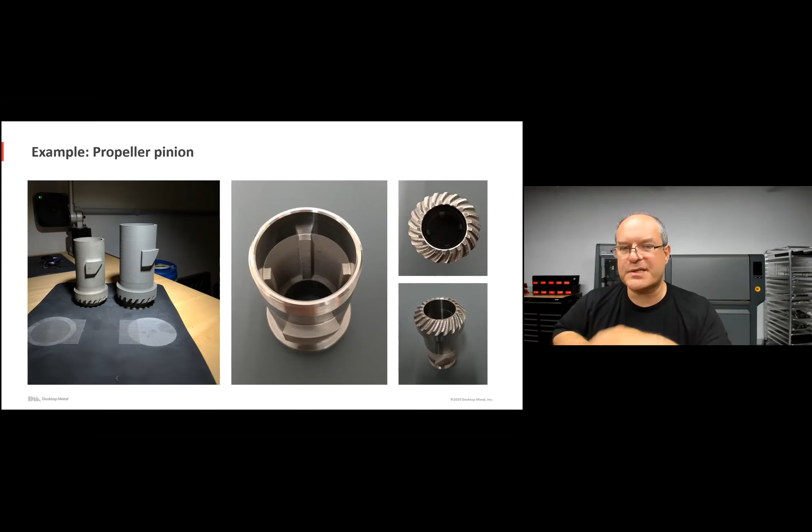With 3D printing, you print the part, sinter - so what you're seeing here is the shrinkage in the furnace. Don't worry, the software takes into account the shrink by scaling the part up appropriately. Then the blank is machined. What's great here is by printing the part much closer to the final shape, there's actually less machining required. You see these are the machined surfaces, and the part works fine. So now, instead of casting and waiting for the whole operation - alloy procurement, wax setup, tooling - you can simply 3D print on demand what you need.

All right, so that's machining, grinding. Now let's spend just a second on heat treatment. Decided to sneak this one in because it's kind of a post-processing of the parts. There's a bunch of applications where you care about the hardness of the parts you're printing. Typically when they come off the studio, shop, or production system, they come out of the furnace with no memory of the shape creation process, which in a lot of ways is an advantage. The parts are isotropic in X, Y, and Z, similar characteristics.

You literally can take a slice and you cannot tell from the crystal structure or grain size what the image looks like - you cannot tell the printing orientation. But one of the consequences of them coming out fully annealed is they're relatively soft - could be 27, 30, 32 Rockwell C hardness. For many applications that's perfectly fine, but if you want even higher hardness, whether for tooling applications or other reasons, you may want to harden the parts. The good news is the parts you print, whether on the studio system using bound metal deposition or on the shop or production systems using binder jetting, are totally heat treatable using the familiar ways you'd heat treat wrought parts.

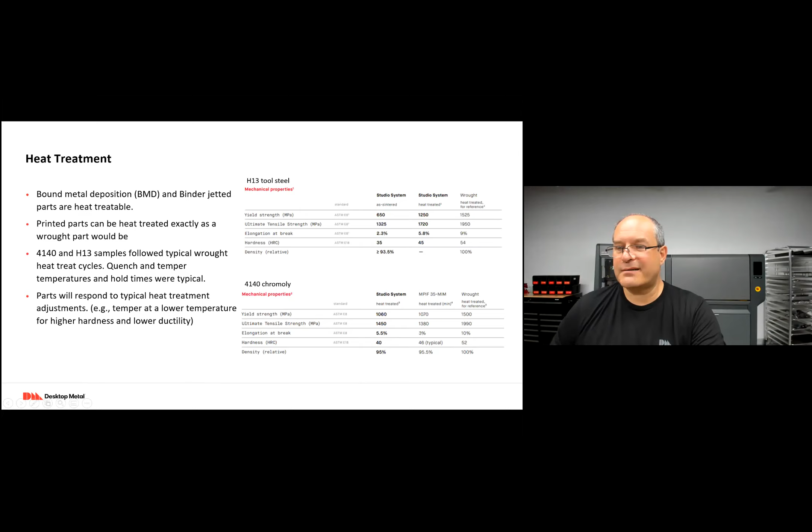4140 chromoly steel, once heat treated, has a yield strength of over 1,000 megapascals - more than a gigapascal, which is pretty crazy. And the Rockwell C as heat treated for 4140 is 40. So you can get some great parts.

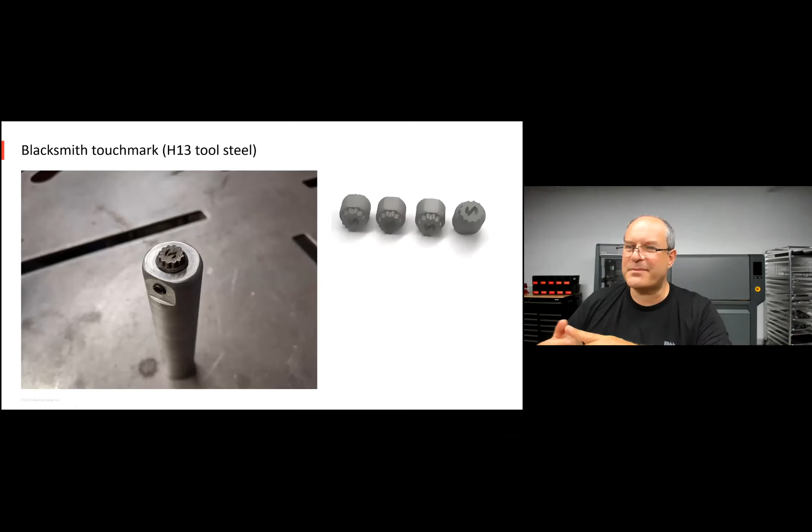Let me show a couple examples. This is a blacksmith touchmark - kind of like a brand stamp for a blacksmith. It's printed on the studio system in H13 tool steel, hardened. And here he is branding - I'll play this video so you can see how he's branding this very hard part. He's taken his brand and whacking it with a hammer.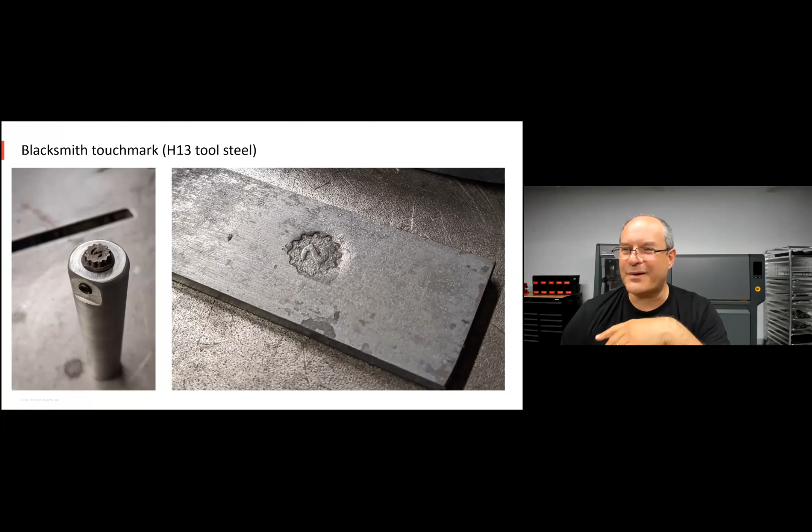That part that imparted the stamp was printed on the studio system. It was H13. So we're going to see it close up in a second. Think about the crazy heat and forces involved here - no problem with this. Once the part cools down, here's what it actually looks like. Here's the stamp, and here's the part. Not an everyday application, but it drives home the point of the heat and forces involved with these parts that you can 3D print.

Another great example of when you need hardening: here's a gear for earth drilling machinery. These are machines that are a couple stories high that drill giant holes in the earth. At the heart of these machines is a gearbox, with a sun gear at the center of it. This transmission gearbox with the sun gear takes 3 months to get.

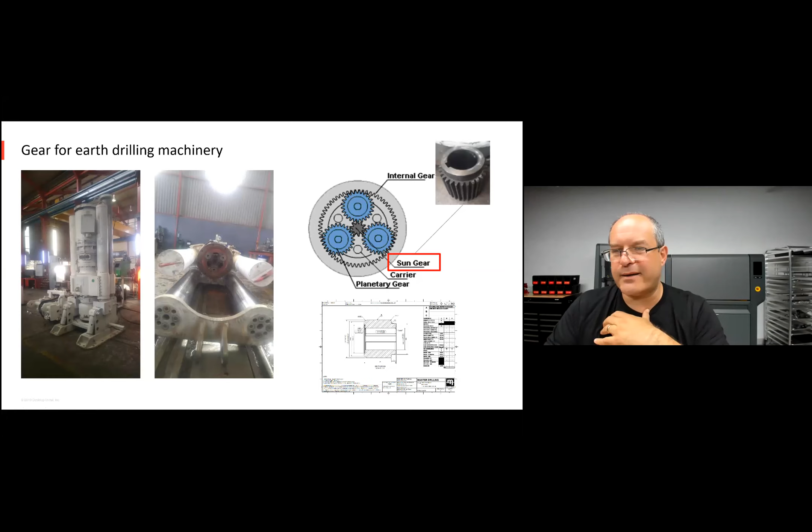If you order that sun gear, it takes 3 months to get it from China, from the foundry there. Instead, you can 3D print it. Here's the part. By the way, you can print parts that are even bigger than that - this is kind of an insane example. This is bigger than my head.

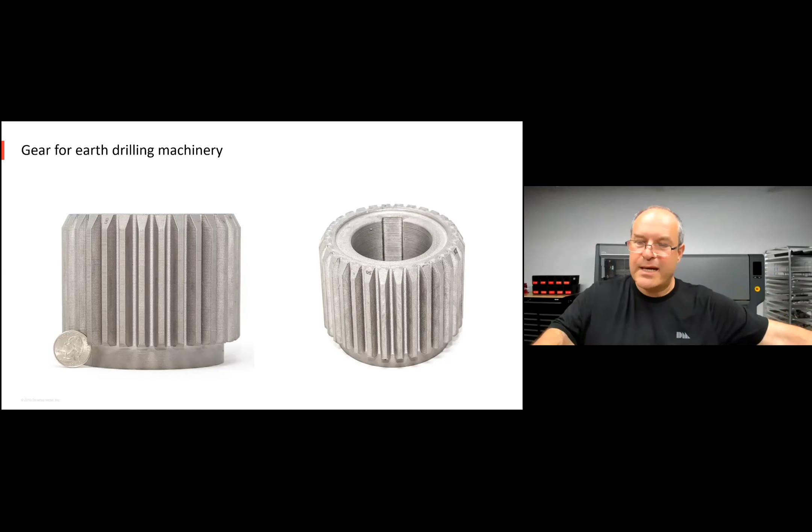That was printed on the shop system. This thing was printed on the shop system. This part was printed on the studio system. Why am I telling you about this part? Well, because when it's mounted and interacts with the other gears, it's got to be right at the teeth where they're making contact.

It's actually quite important for this gear to be very hard, in terms of Rockwell C, so that it's not soft here. It doesn't spin fast, but it's important - it transfers a lot of forces. And so here's a certificate.

I'll point out a couple things. First of all, the part started as a 17-4 part coming out of the furnace fully annealed, so that means about 22 to 25 Rockwell C. After age hardening, the entire gear got to 43 Rockwell C. Quite hard, but that's not enough.

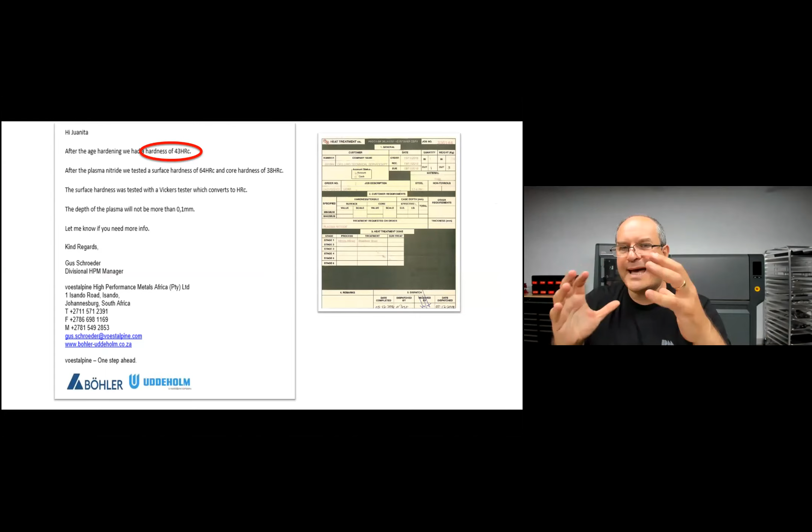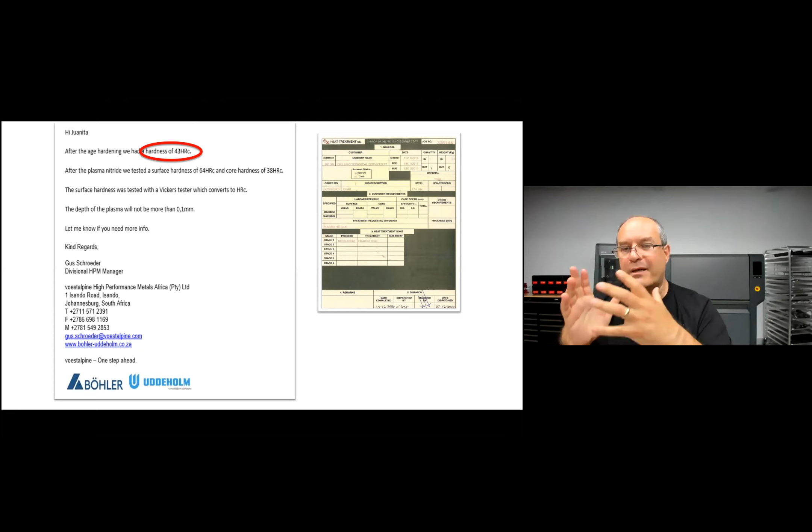So the part was then plasma nitrided. It's a case hardening process where a gas interacts with just the top surface and forms almost like a ceramic. This nitride winds up being 64 Rockwell C, not throughout the entire gear, but just at the interface of the teeth where all the action is. So for that 1/10 of a millimeter, it's 64 Rockwell C - kind of an extreme example of what you can do with these parts that start out relatively soft.

All right, switch gears. Now let's talk a little bit about wire brushing. This is one of the easiest, quickest ways to deburr, blend edges, remove surface imperfections, and remove oxide. I use this on my barbecue grill, but you might want to use it on your metal printed parts.

We do. Here's an example of a copper heat exchanger. Copper develops a nice patina over time. If you want this to be shiny, red, beautiful copper, just give it a few brush strokes. You can do a variety of things.

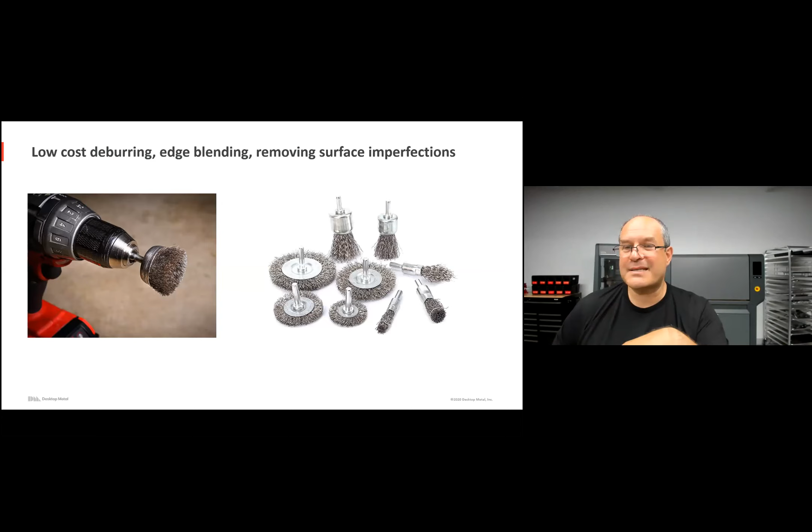It doesn't have to be this manual process. You can buy a bunch of these brushes, put them on a drill, and make it even easier on yourself. Or you can have a little table setup for $100 on Amazon. This wire wheel can be used.

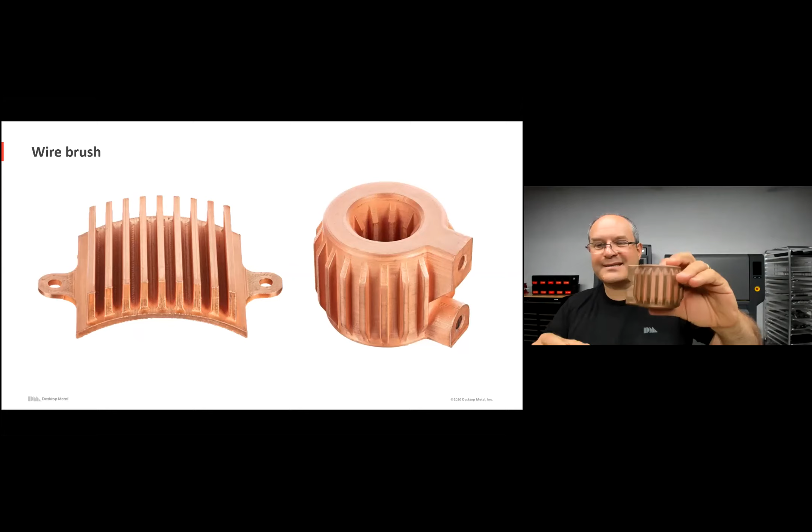So here's examples of wire brushed gears, and here's this example - the same heat exchanger on display. It's got less of this patina because it was wire brushed.

Moving along with a couple more examples, you've got polishing and buffing. Polishing is an abrasive process where that abrasive is glued to the work wheel, whereas buffing is a loose abrasive applied to the work wheel. With polishing, it's a more aggressive process; buffing is less harsh. You can use them in combination.

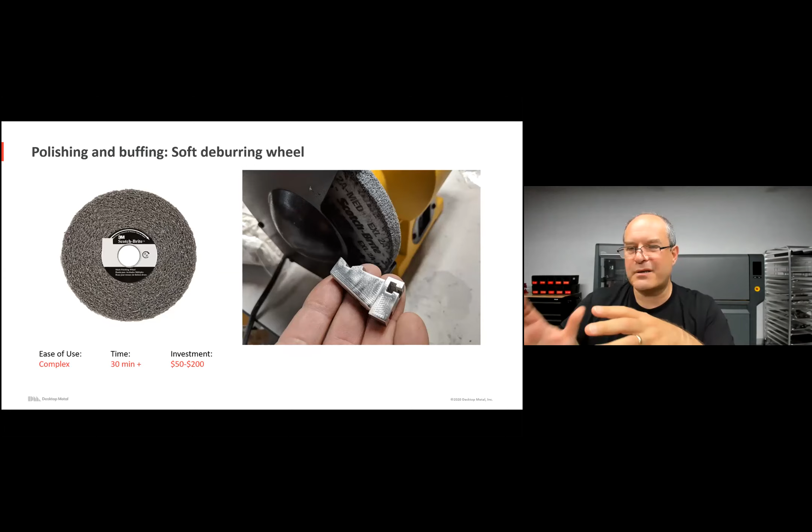If you want a mirror finish, you can do polishing and then buffing. Depending on what kind of finish you want and what characteristics the part has, you can use a variety of formulas - rough abrasives, finer abrasives, or even buffing wheels. You can do this with Dremel tools, which have disposable abrasive wheels, or a soft deburring wheel on the same benchtop model. This is a relatively easy thing to run.

All of these solutions you can get for under $200 and have a nice buffing, polishing wire wheel setup really inexpensively. So what's the bottom line? The bottom line is you can 3D print amazingly complex parts.

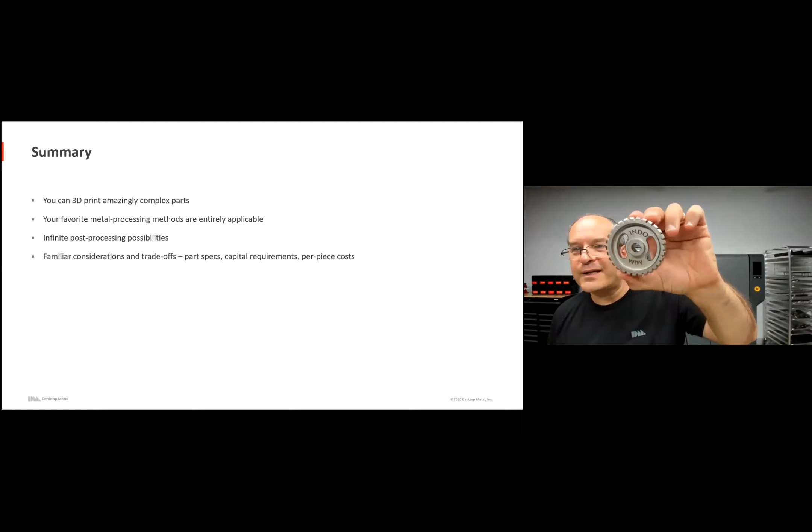Let's see, are there any that I didn't show? You can do cool gears, geometries you can't mold or machine because they're so complex. They're assemblies. You can do small parts, large parts, parts that normally would be several parts together. Some more examples of impossible geometry, like this fuel atomizer with internal slotted channels that curve.

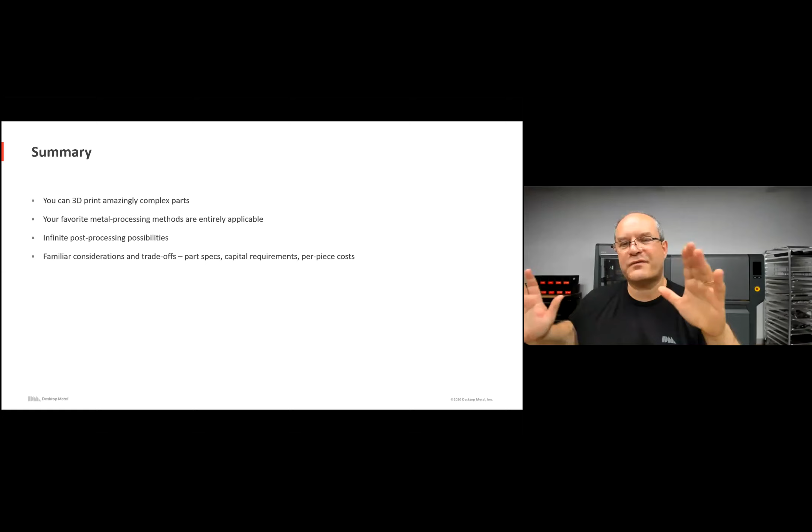So you can print a whole bunch of amazing complex parts, and your favorite metal processing methods are entirely applicable here. There's a ton of post-processing possibilities, and the familiar trade-offs with costs, capital equipment, what you want functionally from the part, and processing time. So it's very likely that if you need a particular finishing method, there's a technique entirely applicable to the 3D printed parts.

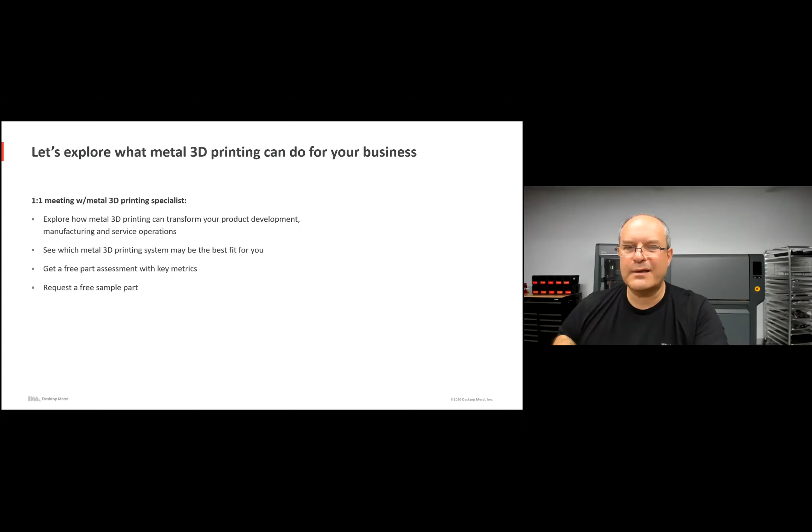So if any of the stuff we covered today sounds relevant, we'd welcome an opportunity to chat with you, look at your applications, and see if there's a 3D printing system that may be a fit for you. And if so, provide a benchmark part with all the metrics on what it would take to produce it, throughput, cost, etc. So with that, I'm going to take a look at whether there's any questions left, and if not, you'll be free to go.

So let's see if there's questions. In your quality measurements, what is the preferred method? Is X-ray for internal imperfections the preferred method or something else? Also, in regards to when to do the QA, is it after the surface finish process or before?

Okay, a couple questions in there. First of all, if you got to X-ray the parts - so during development, of course, we X-ray the parts, EDX, do cross-section, do surface analysis, to really understand what are the imperfections. The parts are polished. We look at the grain structure, the phases. All that is part of the material science involved in developing these.

That said, hopefully that's something you either never do or do once. This is not something where if you got to X-ray parts as they come off the assembly line, that process is probably not robust. The whole point of the couple hundred people that work here at Desktop Metal is we develop the process, the equipment, so that you don't have to X-ray the parts.

So really the QA that's necessary typically is, hey, you printed the part - does it meet the dimensional characteristics? Either throw a micrometer onto the key dimensions, or you could scan the parts and see what is the overlap between the geometry you requested and the geometry you got. Is it to spec? Is it just a scaling thing? Is it on target? Is it a little too large, too small?